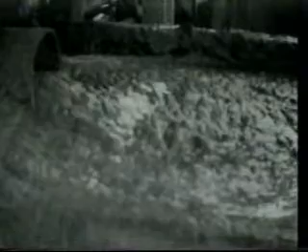Mud logging originated as a well site practice in 1939. Its objective was to sniff for hydrocarbon gases arriving at surface in drilling mud in order to evaluate oil and gas conditions at depth. The rationale was simple. If we measure an increase in hydrocarbon gases in the drilling mud at surface, then there should be a corresponding increase in the probability of a petroleum reservoir at depth.

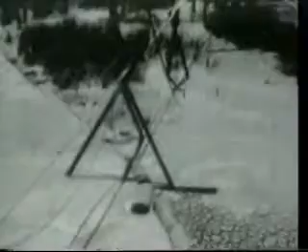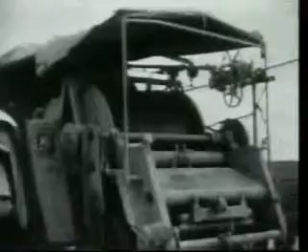The analytical approach developed for the well site was just as simple. Gather the gases which escaped from the drilling mud as it left the discharge line and draw these gases off to a nearby detector where amounts of combustible gas could be determined. These measurements were then plotted according to the depth being drilled, as determined by a mechanical system which measured block or Kelly movement. This made mud gas results comparable with wireline logs, and, it was hoped, identify possible productive zones missed by electric logs of that period.

This initial measurement, total combustible gas, obtained from the hot wire detector, is still plotted on virtually all modern conventional mud logs and remains one of our basic parameters to determine the presence and magnitude of a gas show.

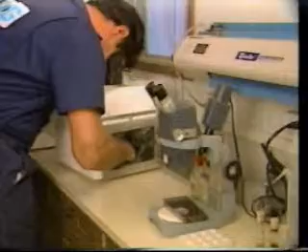As gas analysis instruments became more automated and reliable during the 1940s and 50s, the mud logger had time to assume additional duties: describing cuttings, evaluating oil shows, and logging samples. Many of those routine well site techniques we covered in the module on sample and core handling and analysis. When total combustible gas plots and lithologic descriptions were combined with the rate at which the drill was making hole, that is, the rate of penetration, or ROP plot, the formation log was born. This log has become the essential summary record of conventional mud logging. Its preparation is a central theme of this module.

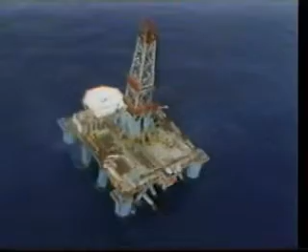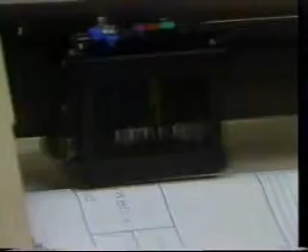In the last 25 years, mud logging capabilities have expanded dramatically. There have been marked improvements in conventional mud logging analytical instruments and data handling techniques. Mud logging tools available today include such improved capabilities as chromatographic analysis of mud gas to measure concentrations of individual hydrocarbons, and computer calculation and drafting of mud log data. Formation log data can also be delivered by facsimile transmitters to home offices as part of daily reports.

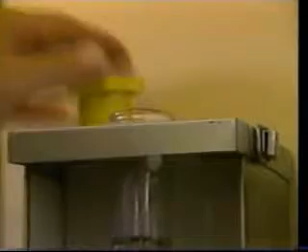Other modern techniques have expanded conventional formation logging practices to provide a more thorough evaluation of conditions at depth. Analysis of fresh well cuttings for gas content and character is one example. Measurement of shale density is another. In the case of cuttings analysis, we can make more accurate estimations of the nature of gas in a show or of possible reservoir conditions at depth because we are looking at the hydrocarbons still in the rock. In the case of shale density, by plotting a density profile as the well is drilled, we can often recognize a change or break in the downhole profile and be alerted to the fact that the bit may be entering the transition zone of an overpressured interval. As we will see, recognition of overpressure is very important when the modern practice of balanced drilling is used.

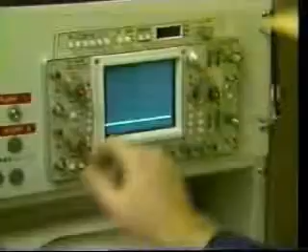Still other tasks now performed by mud logging crews have branched far from formation logging. These are often referred to collectively as advanced mud logging. Their association with conventional mud logging in many situations is simply that all of the tasks are performed in the mud logging unit at the well site.

Although we will not dwell on these in this module, let's look at a few examples.

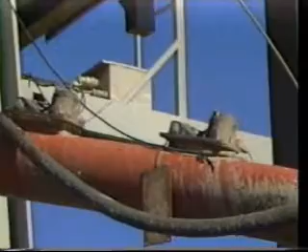Advanced mud logging services include engineering functions, such as providing computer programs for maintaining balanced drilling or monitoring well kill activity; safety functions, such as providing instruments for sensing dangerous gases or mud conditions; or drilling functions, such as providing telemetry systems for monitoring rig operations on and off the rig floor, or providing downhole tools for making measurement while drilling.

Now let's concentrate on conventional mud logging with its formation log and see how we reconstruct the conditions at depth from cuttings and mud gases.

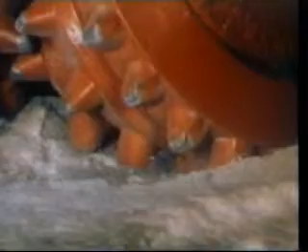Conventional mud logging starts here. As the bit crushes the rock, cuttings and liberated fluids are picked up by the circulating mud to be borne up the well annulus toward the surface.

And it ends here, with descriptive and analytical data summarized on a formation log. Getting from here to here is the task of the mud logging crew.

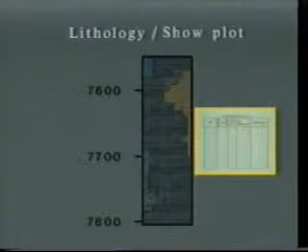Most modern formation logs consist of a rate of penetration curve, lithology and oil show plots, a total combustible gas curve, individual hydrocarbon gas plots, plus a descriptive track to provide room for written comments related to lithology, mud conditions, tests, or any information pertinent to interpretation of the formation log.

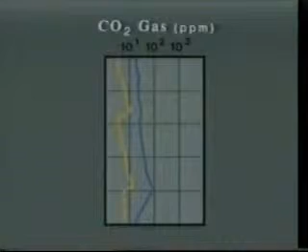Modern logs can also show both total content and individual components for cuttings gas. In addition, if such parameters as shale density or non-hydrocarbon gases are measured during mud logging routines, they also may be plotted in one of the columns of the modern formation log.

From its overall appearance, you can see that the formation log is similar in many characteristics to wireline logs. Its heading, for example, provides the necessary detail for accurate location and well description. Its vertical scale, as another example, normally matches that of wireline logs run in the same well, which permits direct visual comparisons to be made between them.

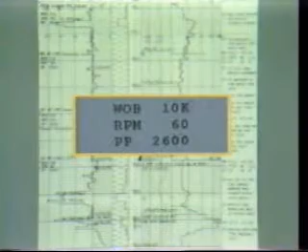However, the formation log is also considerably different from the wireline log. For one thing, besides containing more curves and plots, it carries much descriptive detail. As you can see here, there is information on mud properties, operating conditions, bit changes, casing sets, hole deviation, and depth of hole each midnight.

A completed mud log actually represents the total drilling life of the well, not just downhole runs made at short intervals while drilling was suspended and the drill pipe was out of the hole. The formation log, unlike the wireline log, is a well's graphic diary or chronology prepared throughout the drilling life of that well. And because it is prepared as events occur each day, it can be used in two ways.

One, as an immediate reference to downhole conditions shortly after they are encountered by the bit, and two, as a historical record of the drilling activity of the well.

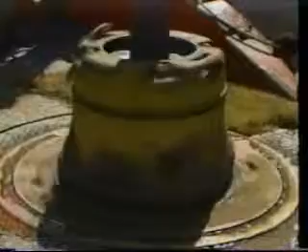Returning to conventional mud logging, we have indicated that a number of modifications occur to cuttings and fluids from the time that the bit crushes rock at bottom hole to the time that samples are available for evaluation at surface. Let's look at the most common modifications, particularly those related to cuttings and mud gases, so that you are aware of them when working with a formation log.

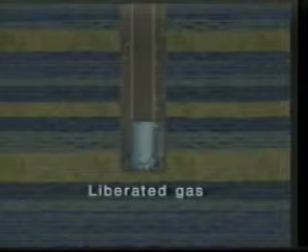As the bit grinds ahead, cuttings and entrapped gas, oil, and water are released. The gas which escapes from the crushed rock is called liberated gas. Liberated gas, and of course liquids as well, join any other gases recycling in the mud and move uphole with the cuttings. The cuttings, at the same time, will become mixed with any sediments recycling in the drilling mud.

The amounts of recycled gas and rock particles will depend to a large degree on the use and effectiveness of desanders, desilters, and degassers in the mud system at surface.

As this mixture of bottom hole and recycling material moves up the well annulus, it may be joined by produced gas seeping in from permeable formations and cavings sloughing from the borehole wall. The volume of these additions to the mud system will depend in part on the stability of the rock in any uncased section of the hole and the effectiveness of mud cake and mud overbalance to prevent influx of fluids.

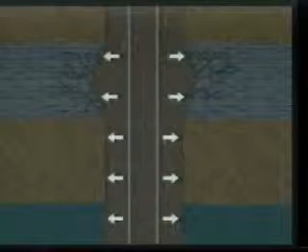And it also is possible that this whole mixture can be churned up wherever the borehole is irregular, so that cuttings and gases from the mud above will be added to our sample interval.

As this further modified mixture continues uphole, the hydrostatic or confining pressure of the circulating mud is reduced, and more liberated gas escapes from cuttings as all of the gases in the mixture expand.

The hydrostatic pressure drop, together with the temperature drop which occurs during uphole travel, also permits complex phase and solution changes to occur between gases and liquids in the mud, and between gases and liquids still in the pore spaces of the cuttings.

All of these changes related to reduction in pressure and temperature continue on to surface and may even continue at surface, as we sometimes see in so-called bleeding cuttings. So here's our mixture of cuttings, cavings, gases, and contaminants adjusting to surface conditions. This is what the mud logger has to work with as the returning mud flows into the possum belly.

The mud flows through the gas trap and across the shale shaker. To keep our approach systematic, we will first look at tracks and plots prepared mostly from data reflecting the rock being drilled: the rate at which the bit penetrates the rock on bottom, and the lithology and character of the cuttings produced. Later in Unit 2, we will study data which come primarily from the gases and liquids recovered from the mud and cuttings.

Rate of penetration, or ROP, is developed from two inputs: a Kelly monitor, which measures the amount of hole drilled, and a clock system keyed to on-bottom time. The most commonly used Kelly monitor is this sensor wheel, typically driven by the same cable that drives the driller's geolograph, measuring the Kelly's up and down movement.

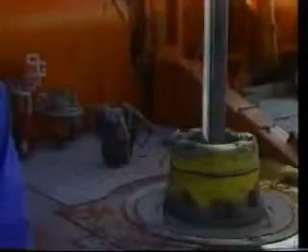While the bit is drilling ahead and the Kelly is moving down, each rotation of the depth wheel sends a signal to the mud logging unit. This in turn activates a counter which then records the new bottom hole depth, or drill bit depth.

A simple mathematical calculation carried out at equal footage intervals or equal time periods yields an ROP value in minutes per foot or feet per hour. Or, if the metric system is in use, ROP will be expressed in minutes per meter or meters per hour.

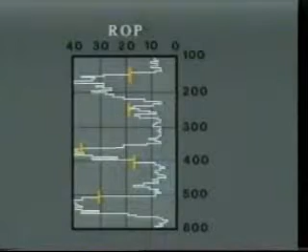In nearly all cases, ROP measurements are averaged over a drilling interval, 5 feet as shown here. In this example, we have plotted the ROP average as a bar graph. When ROP is plotted in time units, such as minutes per foot, the increments decrease to the left. The inverse is true when distance units are used: feet per hour values increase to the left. With these formats, an increase in penetration rate always shifts the plot to the left.

And this brings us to the use of ROP data. When you stop to think of it, penetration rate is the first direct indication we have of the conditions at the bottom of the hole. It is nearly instantaneous transmittal up the drill string of the bit's response to rock on bottom. It may precede by an hour or two the information being carried to surface in the circulating mud.

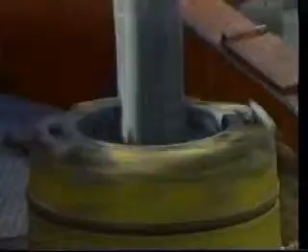A number of factors control penetration rate. Some are related to the drilling system; the condition of the bit is an example. Certainly, as a bit wears and becomes dull, it will make hole more slowly, and penetration rate will drop. Other factors are related to drilling operations.

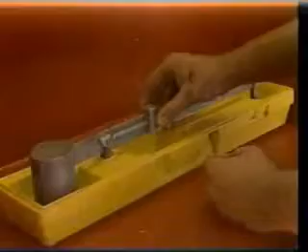An increase in rotary speed will generally result in an increase in penetration rate, since more energy is being applied by the bit in the same time interval. An increase in mud weight, in contrast, will reduce penetration rate, as the added mud weight acts to hold down the rock below the bit face.

But at this point, we are most interested in what the penetration rate can tell us about the drillability and the pore pressure of the rock on bottom. If drilling systems and operating conditions are relatively constant, we can then observe the effects of rock drillability and pore pressure.

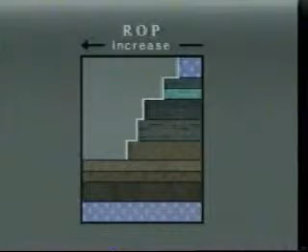Here we see that as a bit passes from one lithology to another, the rate of penetration changes because different rock types have different drillabilities. Lithologies like anhydrite, limestone, and dolomite generally have poor drillability. Shale and siltstone, followed by sandstone, generally are more drillable. And unconsolidated sand, coal, and salt have high drillabilities.

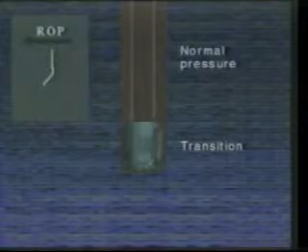Here is the pore pressure effect. You can see the change in rate of penetration as the bit moves from a normally compacted rock to an undercompacted rock of the same lithology, that is, into an overpressured zone. In this case, penetration rate increases.

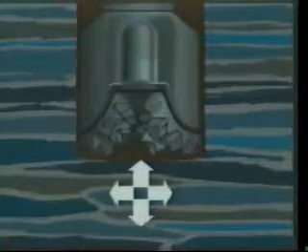Overpressure, that is, an unusually high pore or formation pressure, will result in an increase in penetration rate for two principal reasons, if all other drilling factors remain the same. First, the rock is more drillable. The grains in the rock are being held apart by the high pore pressure, so that the drill is more effective in physically breaking the rock apart.

Second, there is less differential between the pore pressure and the mud weight at the bit-rock interface. Therefore, mud hold-down pressure is less, and the drill will cut more effectively. Drillers don't mind the increase in drilling rate as a result of very little mud overbalance. Taking full advantage of low interface pressure is in fact a principal objective of balanced drilling.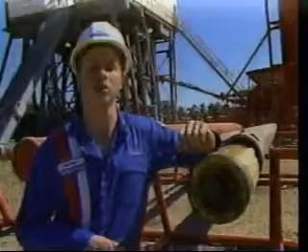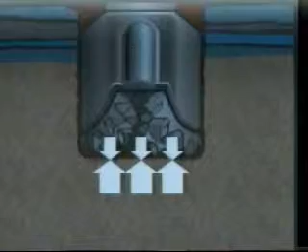Generally, the faster a rig can make hole, the better, as long as cost and other operating factors remain the same. What may be a problem in this situation is the fact that overpressure is present. The situation may be developing where formation pressure will continue to increase abnormally and will exceed the counterbalancing weight of the drilling mud. This will permit formation fluids to enter the hole, further lighten the mud, and increase underbalance. This sets the stage for a strong well kick, or even a blowout.

One important thing to remember from all of this is that we may be able to recognize transition from normal formation pressure to overpressure by an increase in the penetration rate. At the drill site, this and the maintenance of correct mud overbalance is a critical task of mud logging. Experience shows us that when ROP data are systematically plotted, a number of features generally can be identified and projected to rock drillability and pore pressure conditions at depth.

This ROP plot generalizes penetration rate in a thick, shale-dominated interval and shows ROP features which reflect different bottom hole conditions. First, you will note that there is a general trend from the top to near the bottom, indicating that penetration rate generally decreases with depth. This is known as the compaction trend.

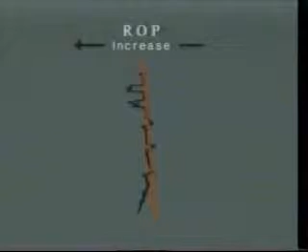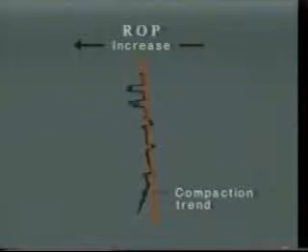This trend should be recognizable in well segments drilled with the same diameter bits if good balanced drilling practices and consistent operating procedures are being followed. The compaction trend indicates increasing lithification with increasing overburden pressure. Deviation from this anticipated trend may indicate undercompaction and overpressure.

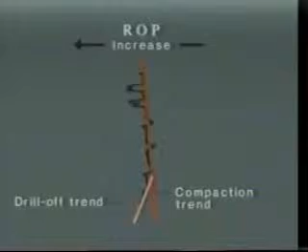That condition is represented by the increase in penetration rate, or drill-off trend, in the shale section near the base of the curve. This is the curve trend you should expect in the transition zone above an overpressured interval.

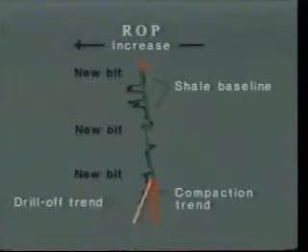Next, you can see that for each bit run within the normally compacted section, there is a fairly consistent decline in penetration rate with depth. In this case, it is called the shale baseline. If the section drilled were in a carbonate section, a dolomite or limestone baseline could be established. The baseline reflects normal penetration rate for that bit with slight influence of wear, and it serves as a basis for recognizing breaks, typically due to changes in rock type.

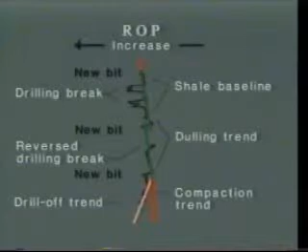Drilling breaks and reverse drilling breaks, as highlighted here, are sharp increases and decreases in ROP, which occur when the bit penetrates rocks with different drillabilities. Breaks may be due to a change in lithology, as we have seen, or a change in porosity. Drilling breaks due to porosity changes may be a good indication of a reservoir lithology. However, drilling breaks can also result from crossing sharply into an overpressured zone, as when drilling through a fault.

Now you can see that by using ROP data alone, it is often possible to gain very early insight into changes in rock type and formation pressure at the bottom of the hole.

Let's move to the next track in most formation logs, lithology. When combined with ROP, the lithology track should provide further insight to bottom hole conditions. Procedures for collecting samples and describing cuttings were presented in Module GL303. They serve equally well for the work of the well site geologist or the mudlogger.

Cuttings lithology is generally presented in percentages for each sampled interval. As shown here, lithology is categorized in 10% increments and plotted horizontally to equal 100%. Because the sample interval in this example was 10 feet, each lithology plot covers 10 feet of drill depth.

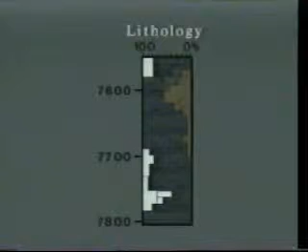Order of presentation in the lithology track is most commonly coarse to fine, right to left. This places sandstone on the right of the track, grading left through siltstone and shale to limestone, dolomite, chert, and anhydrite. Remember, this closely parallels the normal decrease expected in rock drillability. Therefore, changes in the lithology plot should reflect or generally agree with breaks and changes in the ROP curve, if conditions are normal on bottom.

I'd like to point out that the lithology plot will vary widely depending on how it is formatted and prepared. As shown here, it may simply be an estimation of rock type percentages, in which samples are screened to remove large cavings and then described as is. Preparation of this basic lithologic percentage log is required by some operators.

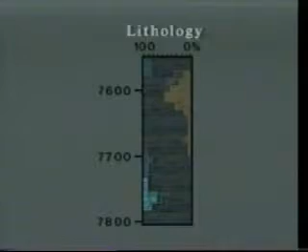The lithology track may instead show cuttings as they are interpreted to have left bottom. This is called a corrected cuttings log, and it reflects the interpreter's skills and familiarity with the geology of the area. In some cases, a second lithology track is added to the formation log, in which lithology is interpreted based on other available information such as ROP. This is known as an interpreted true lithology log.

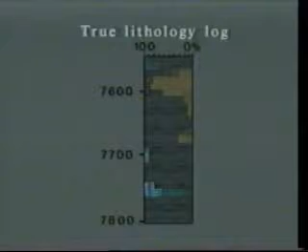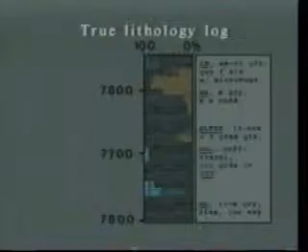Regardless of which lithology log is prepared, abbreviated lithologic descriptions are included in the far right-hand track on the formation log. You can see that the sequence of lithology plots just outlined became more subjective with each step away from the cuttings as they arrived at surface. You will want to remember this when using formation logs in conjunction with wireline logs.

While we're in the cuttings handling area, let's also look at shale density. We've talked about how overpressure will hold grains apart, particularly in shale, and make rock more drillable. Overpressure, in effect, leads to a lower rock bulk density.

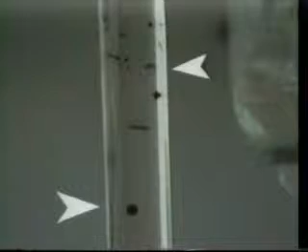A simple method used during mudlogging to measure rock density or recognize changes in density gradient is by using this graduated column, in which the fluid gets denser from top to bottom. As you can see here, beads of different density settle to different density levels in this fluid. A shale fragment placed in the column also settles until it reaches density equilibrium with the fluid in the column. Using the scale determined from beads of known density, it is practical to determine the cuttings density.

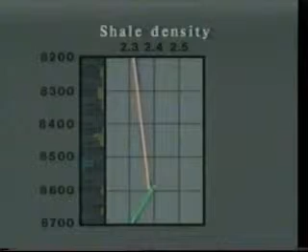This we plot on the formation log at the sample depth. Under a normal compaction scheme, we expect shale density measurements to increase progressively with depth. When a shift or reversal from the normal gradient occurs, we may be seeing the transition from a normally compacted to an undercompacted or overpressured interval.

Just as we may be able to recognize the transition into an overpressured interval by an increase in the rate of penetration, we may be able to recognize or confirm the same transition zone by a break in the shale density gradient.

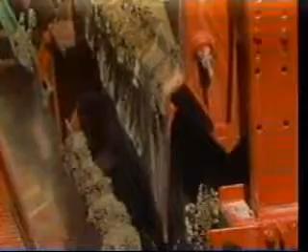A transition zone can also be indicated by an increase in cutting size and volume, and in their appearance. These too are due to improved drillability associated with overpressure. As with all geologic interpretations, the more confirmation you can get on a change in pattern, the stronger the indication that an anomalous condition is developing.

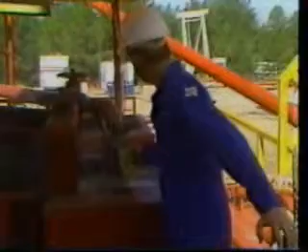Our gas analysis program is interested principally in those hydrocarbons which are gases at atmospheric temperatures and pressures: methane, ethane, propane, and the butanes. During mud gas sampling, a stream of returning drilling mud flows steadily through the gas trap.

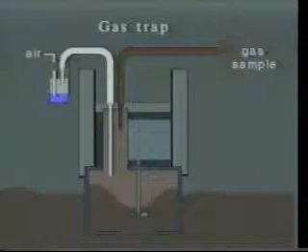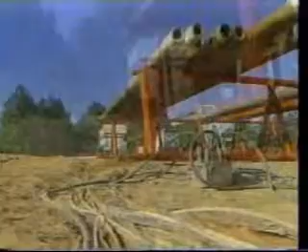Inside the gas trap, typically mud is agitated. Gases in the mud escape and rise into the headspace in the top of the trap, where they mix with air entering the trap, and then are drawn off by a vacuum system. The extracted gas and air mixture then travels from the gas trap through tubing to the mud logging unit.

In the process, the gas is dried and filtered. Once ready for analysis, the gas is metered at a steady flow rate into the analytical system. A portion of the gas sample is split off to pass continuously through the total combustible gas detector, generally referred to as the hot wire detector. This detector produces a continuous reading, generally on a meter dial and a strip chart.

This reading is a measure of all combustible gases in the sample. The total combustible gas concentration will probably be reported in percent equivalent methane in air, or percent EMA. What this means is: first, a known concentration of methane in air has been used to calibrate the detector, let's say 1% methane and 99% air. Second, the concentration of mud gas that was detected has been equated to that calibration response. A calibration gas must be used as a reference value because a typical mud gas is a mixture of many of the combustible gases. The total gas detector combines their total response, or sums their effects. So to compare results over time and between wells, we must make all measurements relative to a known standard.

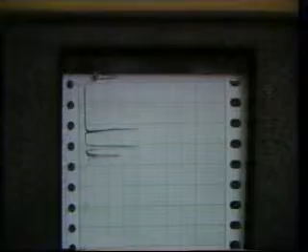Another portion of the mud gas sample is passed into a continuous flow loop. A batch sample is taken every few minutes for identification of individual gas components, which makes up the total gas reading. This hydrocarbon compound analyzer uses gas chromatographic analysis, which typically takes 3 or 4 minutes to separate the compound types and measure their concentrations. Therefore, its output is cyclic rather than continuous, and the output for each cycle gives one reading for the concentration of each gas type. In other words, we can see the relative concentrations of methane, ethane, propane, and the two butanes present in each batch sample. But remember, these are only intermittent values.

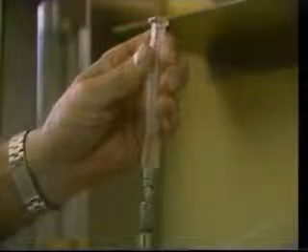Cuttings gas analysis uses the same gas chromatographic system as that used to separate and measure mud gas compounds. The principal difference is that the cuttings gas sample is drawn from the top of the blender jar instead of a flow loop. The output for each compound concentration in the mud gas or cuttings gas can be expressed in percent equivalent methane in air or in parts per million, depending on what system or standard is being used.

It is at this point that the mud gas data becomes available for use in the formation log. We went through the analytical steps rather quickly, but you can pick up the details from the manual. In addition, you should read to see how the four principal gas detector systems work and why we use different ones for different analyses.

To use mud gas information, we must decide what values are going to be transferred to the formation log. There are far too many data points here in the total combustible gas curve to be plotted on a formation log. We must use averages, trends, or extremes, which indicate something about drilling or downhole conditions.

You recall from Unit 1 that when rate of penetration data were plotted for a well, a number of features could be recognized and downhole conditions interpreted. The same is true for total combustible gas data. By recognizing distinctive features which are due to normal operating conditions, it becomes practical to recognize anomalous conditions and make some inferences about downhole conditions.

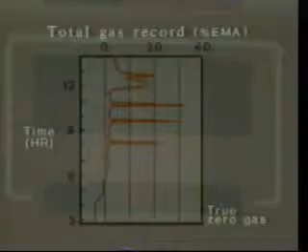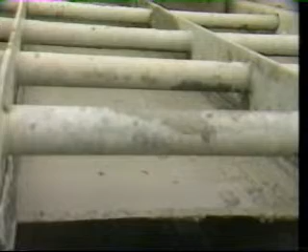True zero gas: from a strictly operational point of view, we need to know what gas reading is produced when the gas trap is inactive and only air is circulating through the mud gas collector system. We can think of this as the sampling system's baseline.

Circulating background gas: next, we need to know the level of gas recorded when no drilling is taking place and only mud is circulating through the gas trap. We can think of this as the mud baseline.

Drilling background gas: then, of course, we need to know what gas reading is normal when the rig is drilling routinely ahead. In other words, what addition of liberated gas is normal during balanced drilling for the interval being penetrated.

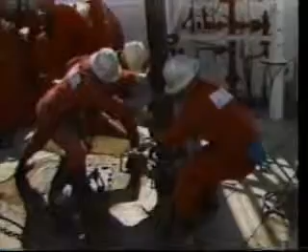Now let's look at some events. Connection gas: this event, or peak, in the total combustible gas trace represents the arrival of gas at surface, which accumulated in non-circulating mud near bottom hole, as a connection was made. Connection gas coming from bottom hole should pass up the annulus and arrive at the gas trap one lag interval after a connection is made and mud circulation resumes.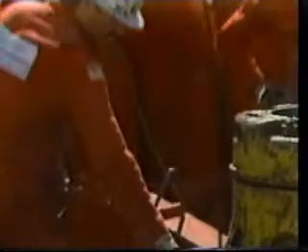Trip gas, or any downtime gas: such a peak indicates the arrival at surface of gas which accumulated in non-circulating mud during the time drill pipe was being pulled or run in, or while drilling ceased for such a purpose as running a directional survey. And like connection gas, trip gas should arrive about one lag interval after drilling resumes.

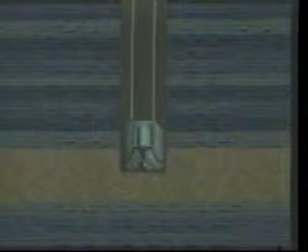Let me point out one important condition involved in trip gas and connection gas. These gases can represent underbalancing events. As the pipe is pulled off bottom, it has a swabbing effect on the open wellbore and a lightening effect on the mud. As we'll see later, this gas arriving at surface after drilling resumes can tell us something about changes in formation pressure. But let's concentrate on the total gas curve characteristics for now.

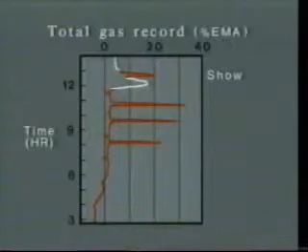A variety of other events can produce peaks in mud gas measurements. The principal one is contamination gas. It will show up on the total combustible gas detector whenever carbide or hydrocarbons, like gasoline, are introduced into the mud system. This leaves us with the unexpected gas peaks, the shows, the original reason mud logging developed as a service. These represent some new condition at depth causing more gas than normal to be in the mud system as drilling proceeds.

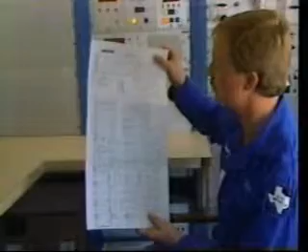Now that we can recognize some features of a total combustible gas plot, and have seen how data for individual hydrocarbon compounds can be reported, here's how you can expect to see this information incorporated into a formation log. We have shown that one or two gas tracks are generally incorporated to the right of the lithology track. In gas tracks, increases plot to the right, opposite the ROP track. This convention gives mirror images between ROP and total combustible gas plots if similar features are being measured.

For example, an increase in penetration rate might indicate an increase in porosity, just as an increase in mud gas might reflect the same increase in porosity.

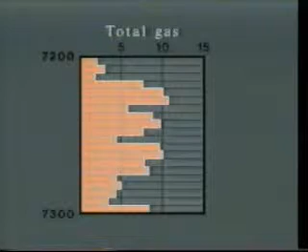For total combustible gas readings, an average is generally determined for each of the smallest intervals carried on the formation log. In our formation log, this interval is 5 feet. This average is generally plotted in the same visual manner as ROP averages, in this case, a bar graph. When we are drilling ahead normally, we can use the total mud gas plot of averages to determine drilling background gas.

If we are analyzing total cuttings gas, we can generally plot its values on the same track as total mud gas. Where we are running cuttings analysis at predetermined intervals only, say every 30 feet as shown here, then we may plot values for individual analyses.

One of the interpretive uses of the total mud gas, total cuttings gas dual plot is to evaluate differences between them. If both analyses are from a show interval, a relatively low content of cuttings gas compared to mud gas is often equated to favorable reservoir conditions at depth. The cuttings are assumed to have high permeability and to have given up their in-place gas to the mud system.

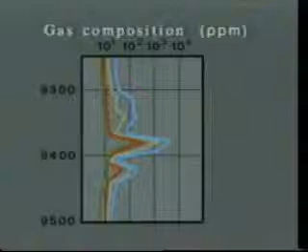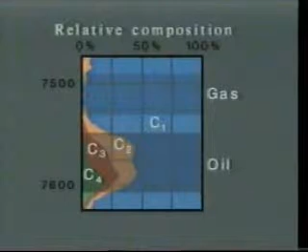Where individual hydrocarbon gas concentrations are determined in mud gas, total concentrations of each compound can be plotted, as shown here. Relative percentages of each gas within the total, as shown here, is an alternate plotting method. Relative percentage plots give a good visual representation of the gas composition, whether dry, mostly methane, or wet, abundant in the heavier gas compounds. These relationships are sometimes interpreted as indicating that gas, or oil, is most apt to be the type of hydrocarbon in place at sample depth.

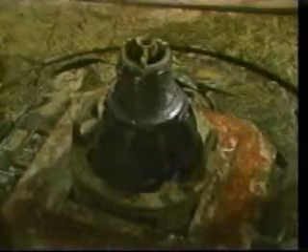On the total combustible gas track, events like connection gas and trip gas, which originate while no hole is being made, are plotted as single lines on the formation log at the well depth where the bit was off bottom. Two features are important here, particularly for connection gas.

One, we use the maximum reading recorded, not the average of the event. Two, most mud loggers subtract drilling background or other gases present from the maximum connection gas reading that was recorded. By removing these effects, we can compare one connection gas value directly to others, uphole and downhole. Being able to compare connection gases is important.

You will recall that connection gas represents an underbalancing event due to the bit and drill pipe being lifted. If we see that successive downhole connection gas readings are getting larger and larger, then we must assume that mud overbalance is declining. One cause of this is increasing formation pressure. We should recognize that a progressive increase in connection gas can mean we are drilling into an overpressured interval.

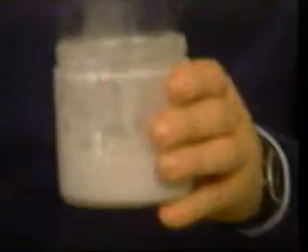Lag gas typically is plotted in the same manner as connection gas, the high reading above the background for the event. If we use the same amount of calcium carbide each time the well is lagged, changes in response can indicate a change has occurred somewhere in the gas sampling and detecting system. Other responses, gas shows for example, may need adjustment accordingly if they are to be compared.

When the total combustible gas readings increase markedly above the drilling gas background level, let's say the gas doubles, then a gas show is occurring.

In this situation, the driller may pull off bottom and circulate up samples, particularly if a drilling break occurred prior to the arrival of the gas. This mud circulation period will carry the cuttings from downhole to surface for evaluation and analysis. As part of the sample examination process, a thorough inspection for liquids, that is, an oil show, will be carried out.

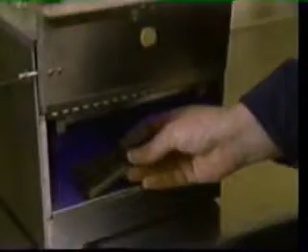Interpreting a gas show is not a straightforward evaluation of the increase of total combustible gas measurements over background. A number of factors may be affecting the quantity of total combustible gas measured during a show which we have been able to ignore during routine drilling.

Let's assume that penetration rate increased prior to a gas show being recorded at surface. A part or all of the increase in total combustible gas may be due to more rock being crushed and more gas being liberated. This will all return to the surface in the same volume of mud. In this case, total gas increase over established drilling background level may have little significance.

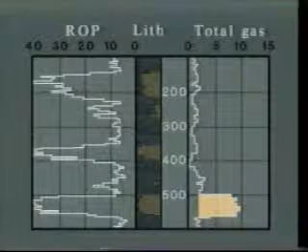If mud circulation rate has been recently increased, the opposite effect may occur. The apparent magnitude of a show can be diminished by mixing the liberated gas in a greater volume of mud.

It is also possible that our show is out of place or smeared out. Drilling mud can penetrate ahead of the bit in a very permeable show zone and flush gas and oil from in front of the bit. These hydrocarbons may not enter the mud system until the bit has passed by and formation pressure has moved them back to the wellbore. And if overbalance is very high, the hydrocarbons may not show up in the mud system at all. These are not the only factors which can modify responses in a show interval.

And if you want to compare one show to another, the mudlogger must consider even more factors. These and the procedures for normalizing data are in the manual.

Now let's see how a show is annotated on a formation log. The depth interval across which a gas or oil show occurs is blocked out in the show column. The high reading for total combustible gas can be recorded next to the curve along with the averages near the show interval. And let's not forget that a show may be recognized visually, an oil show, as well as by gas analysis as shown here.

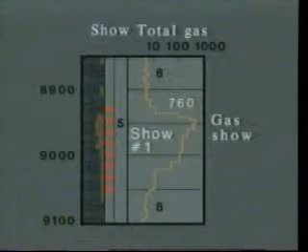Each show is numbered sequentially downhole as it is encountered. Then it is rated. The sequential number serves to identify the show and the show report prepared for it. The rating is the mudlogger's estimation of the quality of the show. In the situation seen on this log, the show was of gas, weak, and given a numerical rating of 5.

That is probably non-productive. Let's take a minute and look at the show report. Preparing this report exemplifies one of the routine tasks performed during conventional mudlogging. It is a written evaluation of the zone of interest which accompanies the formation log. If oil is present, its fluorescence, cut, and character are recorded, together with the apparent porosity and permeability of the cuttings in which the show is found.

If gas is present, its magnitude and character are described. In this case, it is essential to qualify the magnitude of the show relative to the background gas level and many other factors we just covered.

Our formation log is fairly complete with the addition of show data. The remainder of the details to be included can be any information which adds to the understanding of the formation log plots. You can see we have added mud details like temperature and density in and out, plus pump pressure and flow rate. We have drilling details like rotary speed, weight on bit, and condition of bit. We have downhole information like coring interval, drill stem test interval, and logging runs. And we have descriptive details like visual porosity and permeability.

This brings us to the end of our discussion of conventional mudlogging. You should complete the manual and work the exercises. The latter part of the manual discusses advanced mudlogging. We're going to leave you on your own for that. Good luck.